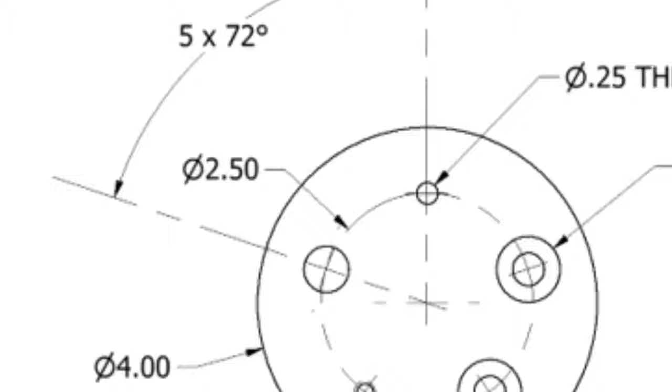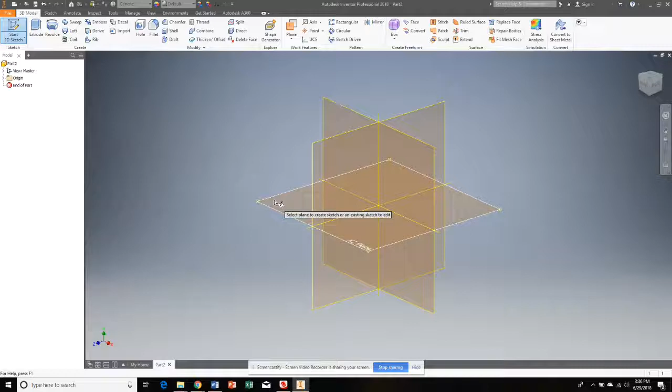Open up a new part in Inventor so that we may begin. Okay, starting off with the hole practice. We're going to start a new sketch, and I'm going to do this on the XZ plane so that I'm looking down on top of it. And I'm going to twist it so that the word top is right side up.

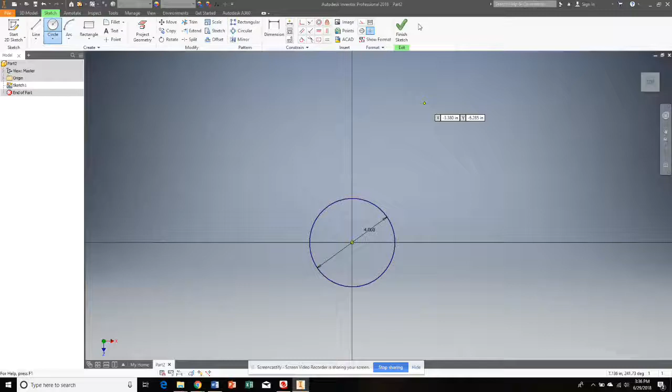And I'm going to start with a circle. This one shouldn't be too tough. We're going to start this whole circle, and it's the entire diameter of the big circle, and that's 4 inches. I'm going to finish my sketch, and I'm going to extrude it, and it extrudes 1.5 inches in depth.

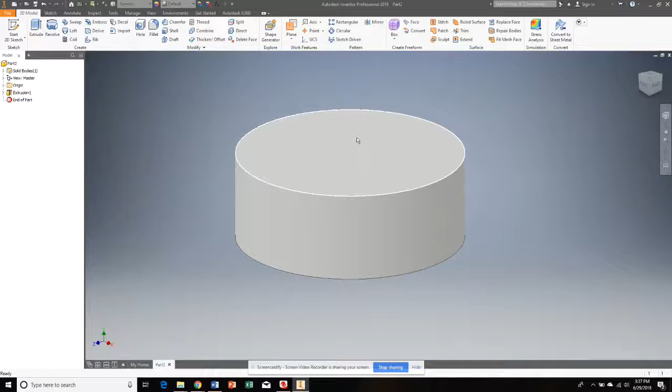So now I have my hockey puck, and we're going to need to go through and put the 5 different holes in this surface. Before we do that, we need to label where those points are going to be. So I'm going to start a new sketch, put it on this surface. Again, I'm going to twist it over so the top is facing the right direction.

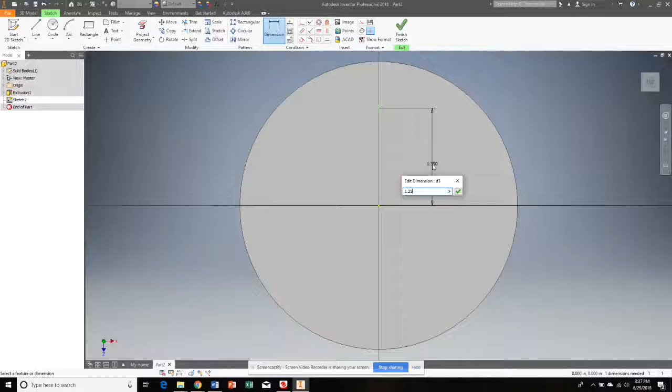And I'm going to put a point, not at the center here, but a random measurement going straight up and down. So my X will be 0 and the Y will be something random. And then I'm going to dimension it from there to the center of the circle. And that's going to be my radius for the inside, the smaller circle. It says the diameter is 2.5, so half of that would be 1.25. 2.5 is the diameter, divided by 2 is 1.25.

And now I'm going to do a circular pattern with this point. Circular pattern. I'm going to choose my geometry. My geometry is going to be just that point. Now I'm going to choose my axis, and it's going to be this center dot. And you see the red and black arrows? That changes the direction of the rotation.

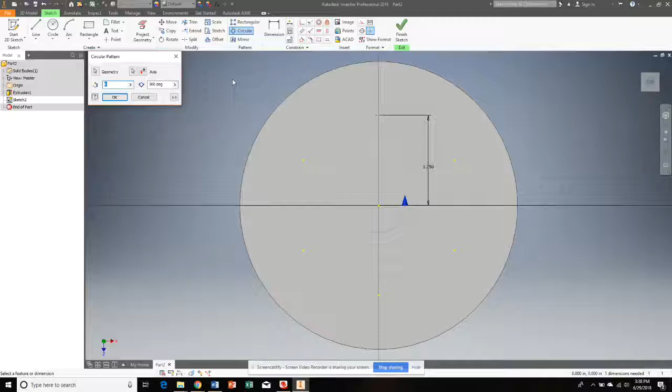That's all that's doing. I don't want it to have 6 points. I only need 5 points. I'm going to say OK. So there's my 5 points around that circle. Finish my sketch. Let me tip it back up so I can actually see what I'm doing.

And now, instead of making my holes off of those, because as soon as I make a hole, it's going to consume those dots, and I don't want to do that. What I'm going to do is insert some points from these work features. And I'm going to use point. And what that's going to do is allow me to choose a point. And I'm going to do that for each one. I'm going to put a point there.

I've got to go back and choose point again for each one of these so that I have all 5 points marked out. And that way when I do my first circle, my first hole, it's going to consume the rest of those points, the rest of that sketch, and I don't want to lose those spots.

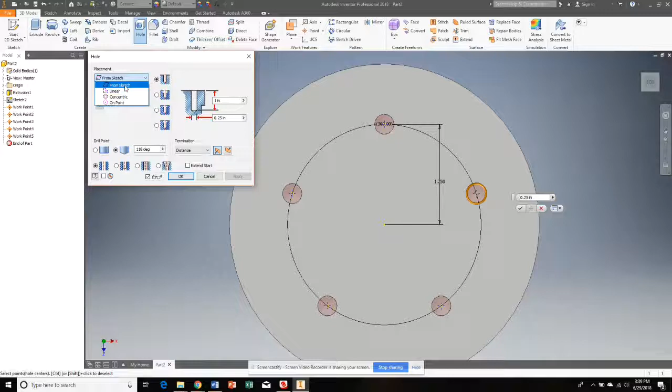All right, so now on to my first hole. My first hole, I don't want it to be from sketch. I want it to be on point. So I'm going to choose this first point here. And then I want to choose the direction. The direction is going to be the circle. And what that does, if I tip this up just a little bit, you can see that it makes the circle go through the depth of the shape.

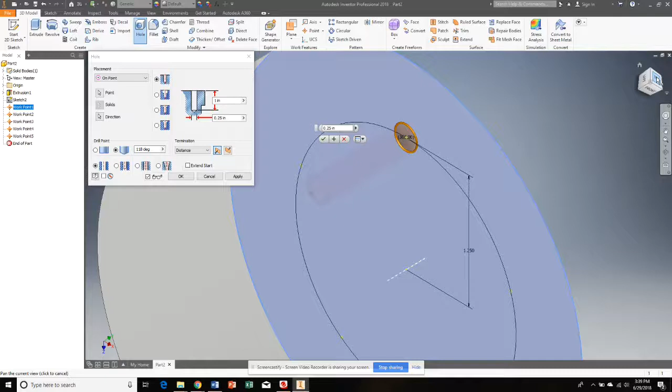So, the first one says that it's 0.25 in diameter, and it goes all the way through. If you look at the hidden line, it goes all the way through. So I'm not going to say distance, I'm going to say through all. And then I'm going to hit apply. I'm not going to hit OK, I'm going to hit apply.

Because now I'm going to go to the second point, and the direction is going to be the outside ring here. And this time, I'm looking for the type of hole that has a shoulder on it. And so I come over here, and that's going to be called a counterbore. And if I choose here and let my mouse sit on top of it, it says Counterbore. So that's the kind of hole that it's going to be.

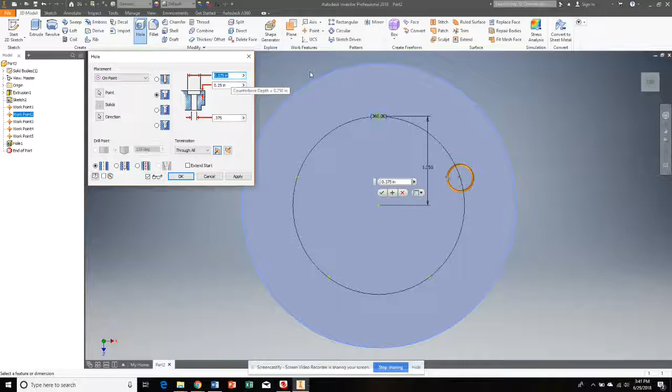And it says that the diameter of the hole, there's two different diameters. One is the small diameter, which is going to be the inside one here. That's going to be 0.375. And then we have the large diameter, which is going to be 0.75. And then how far down does that shoulder go? And it's 0.25, and so that's the default, so that's fine. The hole goes all the way through, so I'm going to say apply.

The next one is a countersunk. So it's going to be countersunk. It's got the V shape in the instructions. So I'm going to go countersink. I want my small diameter to 0.375, and this is why you hit apply and not OK, because it remembers. So 0.375. The degrees are 82 degrees. That's the default. The large diameter is 0.75.

So everything's correct. Now all I have to do is choose my point. I want it to be that one. I need to choose my direction. It's going to be that one. Goes all the way through. I'm going to hit apply.

This next one is going to be threaded, which means it's going to be tapped. I've got to come back up here and choose just a regular drilled hole. I'm going to come down to the bottom down here, and I want the one that says tapped hole. It's got threads on it. So I'm going to choose tapped. It takes a second for this to come up the first time. It's a lot of information that it's trying to pull into the next little window that it opens up.

So the size of this is going to be 1/4-20 UNC. Now I could change that here. If I change this, 1/4 is 0.25, and that changes over here. I could have chosen this and it'll change it over here. 1/4-20 UNC. It says that it's 1B. So I need my class to be 1B.

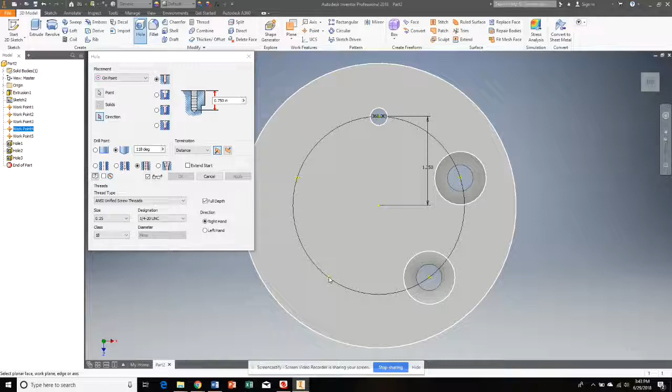And if we tilt it up just a little bit, you can see that it doesn't go all the way through. And that's what our instructions tell us. If you look at the hidden lines, it shows that it doesn't go all the way through. I'm going to hit OK.

The reason I'm hitting OK on this one is that on this last one, you're going to do something, whatever makes you happy. It can't be anything like the ones that you've already done. You have to choose your own thing for this hole, and you're going to make your own thing up. Remember, it needs to be done from point. You're going to choose your point. You're going to choose your direction, and you're going to choose whatever it is that you

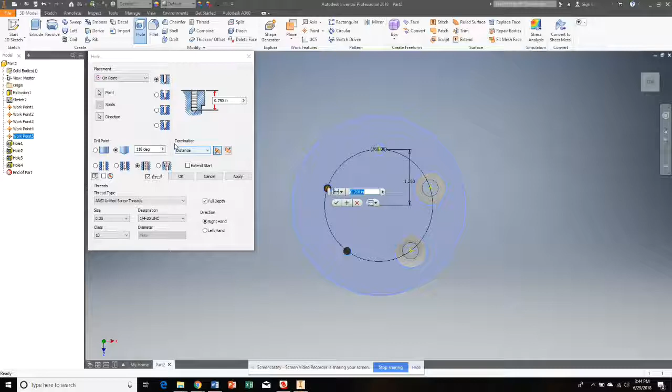you're going to go from point. You're going to choose the direction, and you're going to do whatever it is that you want to do for this hole, whatever makes you happy. So you need to choose what it is that you're doing. Just something. And there you go.

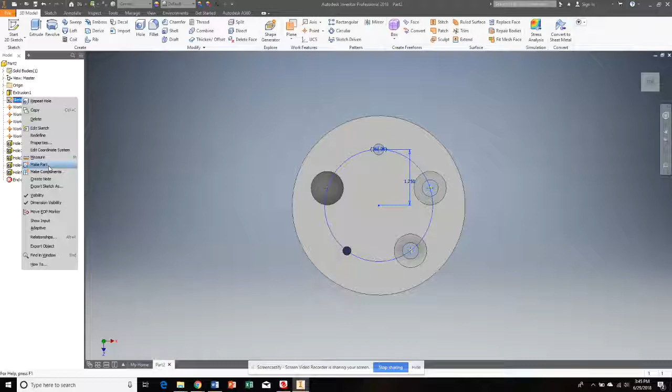To get rid of the sketch on here, I'm going to come over here to this sketch and change the visibility. And there I've got all my different holes. There it is. Make sure you save it in the right spot.